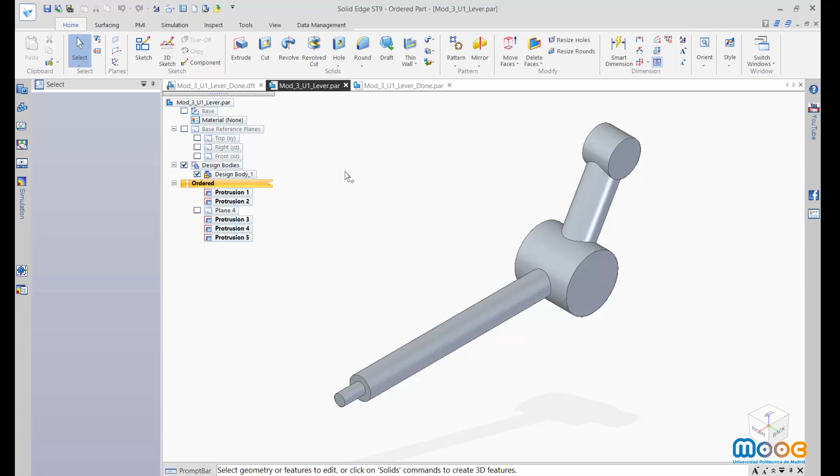In the previous video, we have reached this state of our part, of our lever. But we are going to obtain this final state, in which we have to make other operations. The first operation we are going to do is the little hole in the end of the inclined short arm. We are set on the reference planes to obtain a clear view of this to make the operations.

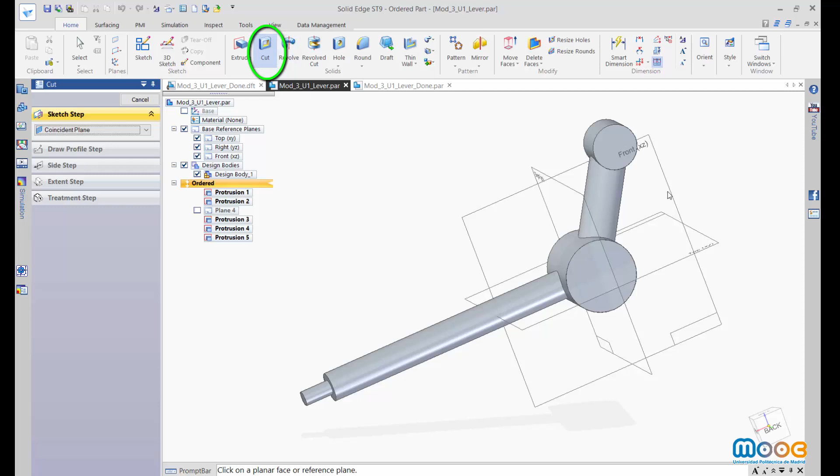The hole we are going to make through the cut operation. We can choose the front plane or we can choose the end plane of the end inclined arm. Let's take the second option. Well, in this case, we're going to draw a circle concentric with the exterior one. Set the dimension of 12 millimeters.

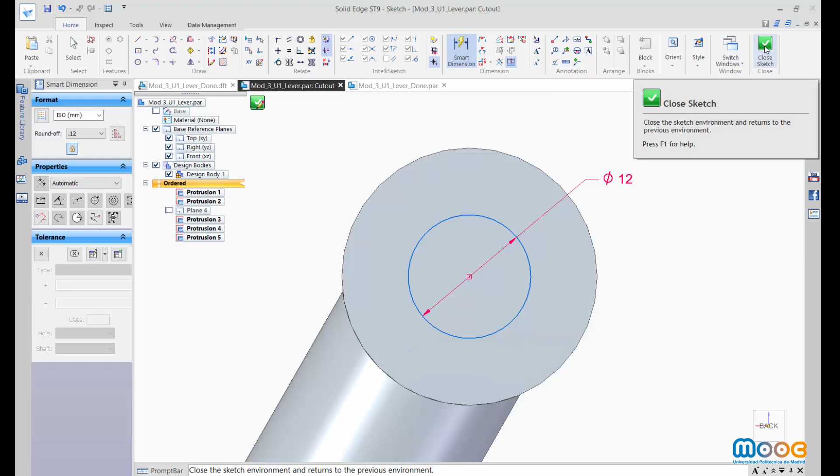We close the sketch, and now we have through-hole extension of the hole in one direction, in the other, or in both. Obviously, in our selection, we have to choose this one or both. Well, finish the operation and save the part.

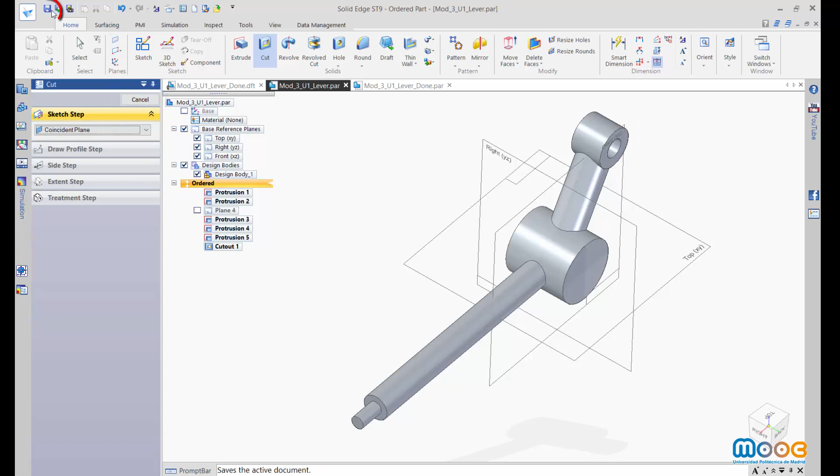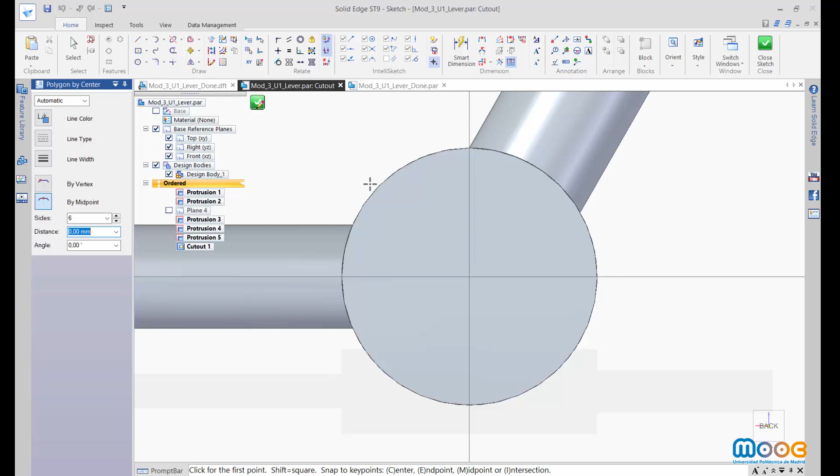The second feature we are going to do is the hexagonal hole in both sides of the lever, in the central cylinder of the part. Well, to do this, we select the cut tool and we select the lateral plane of the horizontal cylinder. Solid Edge allows us to use the polygon by center tool that makes it very easy to obtain regular polygons in

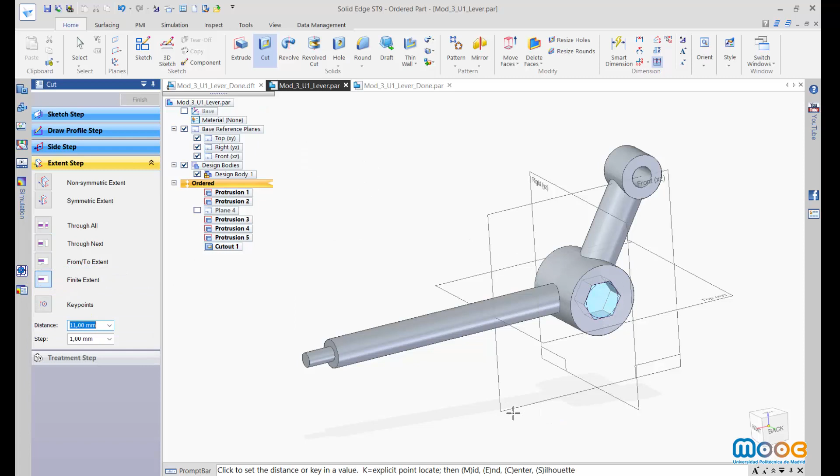the sketch. We have to set a distance between parallel sides of 20 millimeters, close the sketch, and in this case we need to set a finite extent for a value of 11 millimeters. Don't hesitate to change the point of view to have a precise control of the manual movement of the mouse.

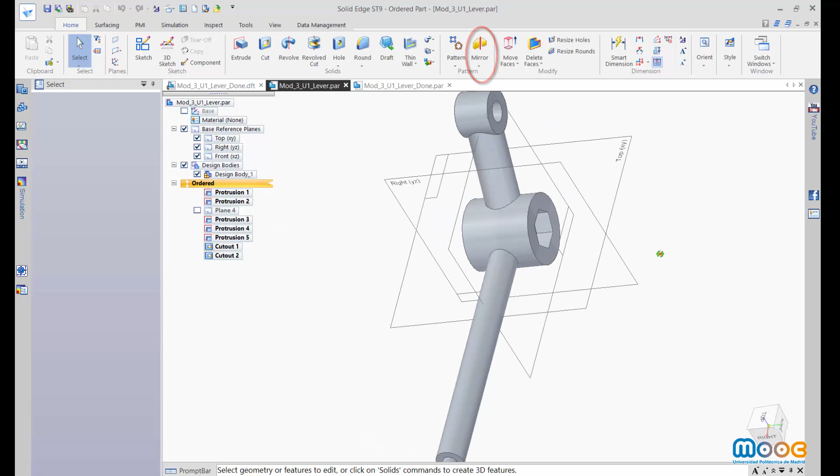And save. To make the other hexagonal hole, we are going to use the mirror operation tool. That is, first we select the operation, select the mirror copy feature tool, and in the bottom line we have an advice to click on a planar face of reference. In this case, the principal front plane.

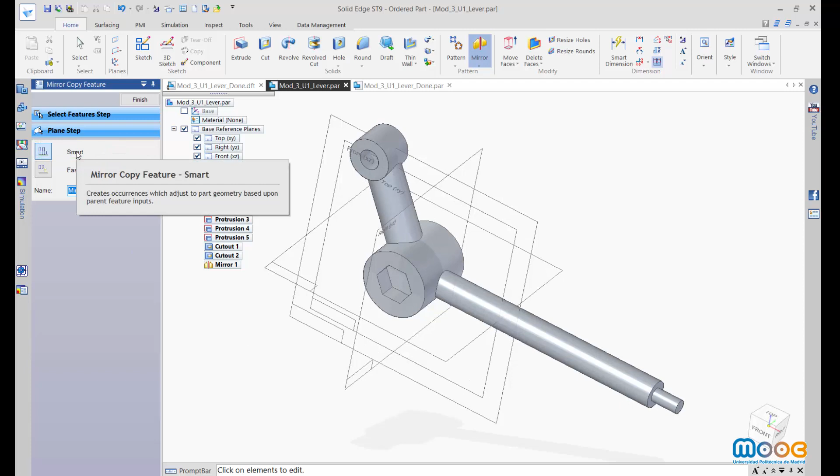We have to realize that we have selected the smart mode way of doing the operation, because sometimes fast mode fails making the operation. The next step is to make a thread in the little cylinder of the end of the long horizontal arm. To make the thread, we have a specific tool.

We click OK. And we have to select the cylinder, which must have the correct dimension that fits with one of the preselected or normalized sizes for the thread. In this case, we have made this cylinder with a diameter of 8 millimeters that corresponds with the metric 8 of the ISO metric thread. Well, we have already selected the cylinder.

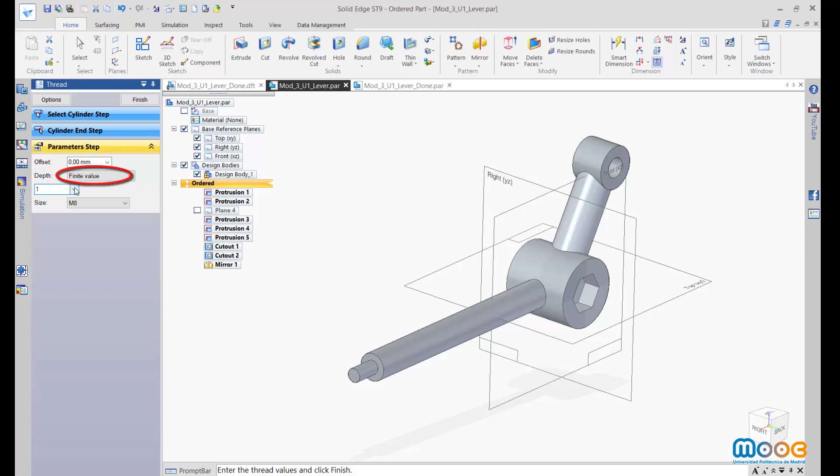We need to select the start of the thread and to set how long we want the extension for the thread. In this case, a finite value of 10 millimeters, 12 millimeters. Okay, with the wheel of the mouse, we can zoom in and zoom out around the pointer of

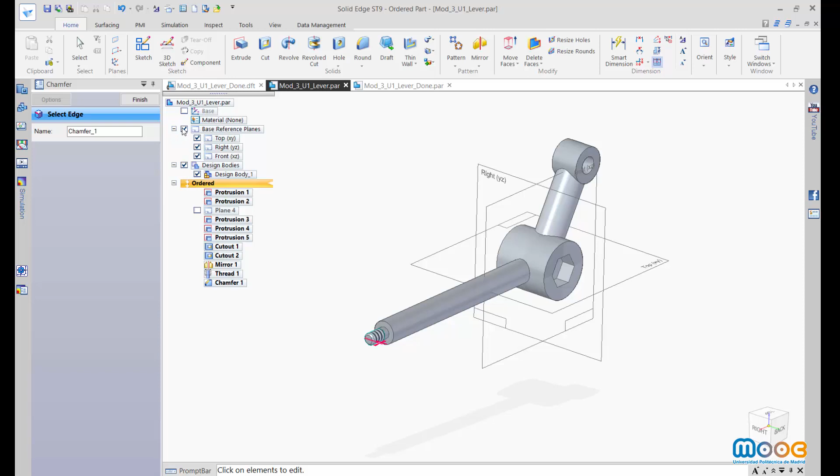the mouse. And the only operation we need to make is a little chamfer in the edge of the threaded cylinder. We accept, and we have obtained the chamfer in the threaded cylinder. We're going to switch off the base references to obtain a clearer view of the part, finish and save, and really we have ended our part.

In module 5, we are going to obtain the draft, the planar drawing, that describes completely this part that we have already made in a three-dimensional way.